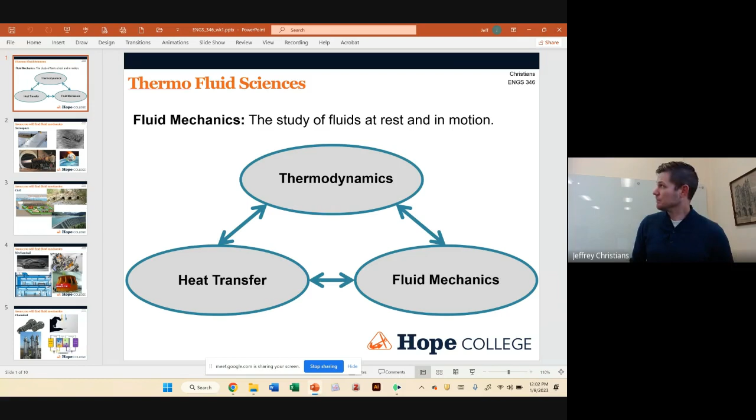So how these things kind of fit together, can put this up. So I know some of you are in fluids. Obviously, that's what we're taking now. Some of you are also in heat transfer. I think almost everybody just took thermo. These things are all kind of part of the same larger, what we call thermofluid sciences. So they all have pretty significant overlap.

If you're taking fluids, and for the couple of you that are also taking heat transfer, especially later in the semester, you'll be like, we're doing the same thing in both classes. All of these areas share quite a bit, because if you want to understand how fluids move and behave and flow, you need to know how energy works in those systems. So you might need energy balances. And if you want to understand how heat moves in fluids, you have to also understand how fluids move and behave. So there's a lot of crosstalk between all of these different areas.

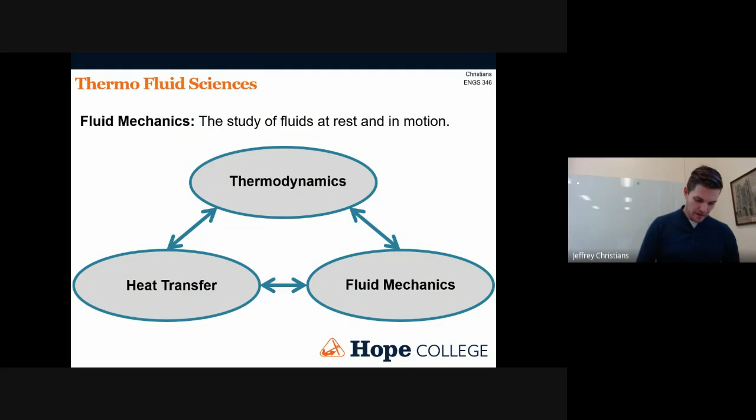No, rats. Ignore. Start working. Don't hit the wrong button. Okay, cool.

So if you want to kind of know where some of this stuff might show up, maybe you'll find something that's kind of interesting to you. We're obviously going to touch in little bits and pieces on a lot of these areas. Obviously, one place that you think of when you think of how do fluids behave, why do we care about this, is in the aerospace industry.

So if you want to look at rocket engine design or airplane wing design, maybe next time you're on a flight, look out the window if you're by the wing, and you'll see out on the edge of the wing these little sticky up things. Why are little sticky up things on the edge of the wing? Well, it's to control boundary layers and basically prevent your airplane from falling out of the sky. So they're kind of important, just these little kind of funky fin things. We'll learn about why those are there, why you would want something like that, and how some of this stuff works and behaves.

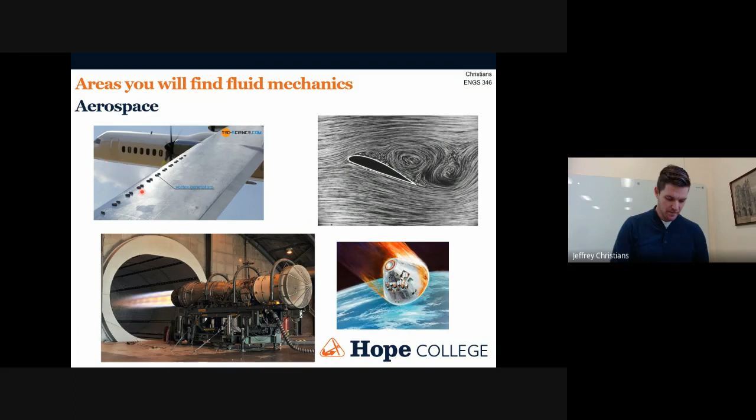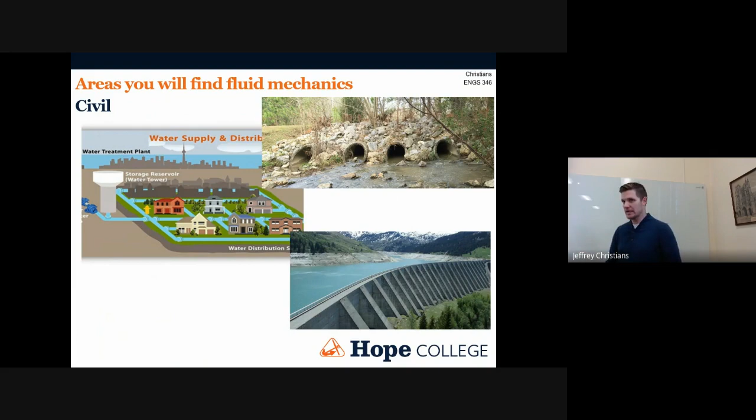If you're a civil engineer, then typically you're not looking at airplane wing design, but you're looking at how fluids flow in, say, a water supply and distribution, or a drainage distribution, or you want to look at how water exerts pressure on something like a dam, or in a system like that. So we're going to learn about things that are kind of related to those types of applications.

Where else? If you're a chemical engineer, often you're looking at fluid flow problems. The top right one is what we would call microfluidics. Sometimes it's actually beneficial to be able to scale things down, especially for diagnostics. There's a whole area of chemical engineering centered around medical diagnostics.

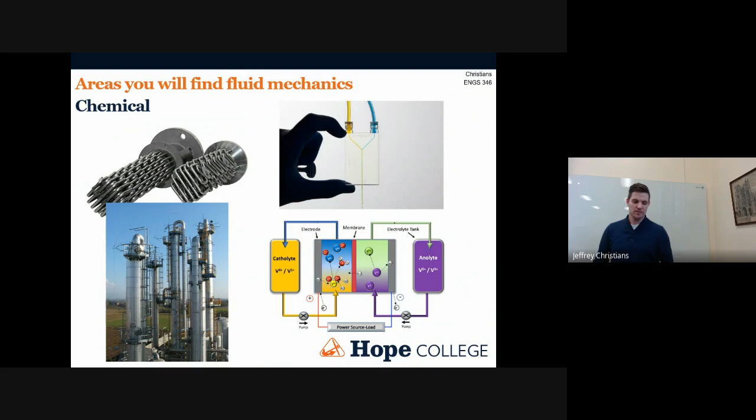And especially for high power, if you want to discharge this really fast, you have to look at how ions are flowing and moving in the solution, and look at the fluid aspects of this battery system as well. Okay, what else?

Biomedical. You're looking at designing an artificial heart, how blood flows through the body, how arteries and veins could clog, any of those kinds of things where you're looking at fluids in the body. Obviously some of the aspects of fluid mechanics are going to be important.

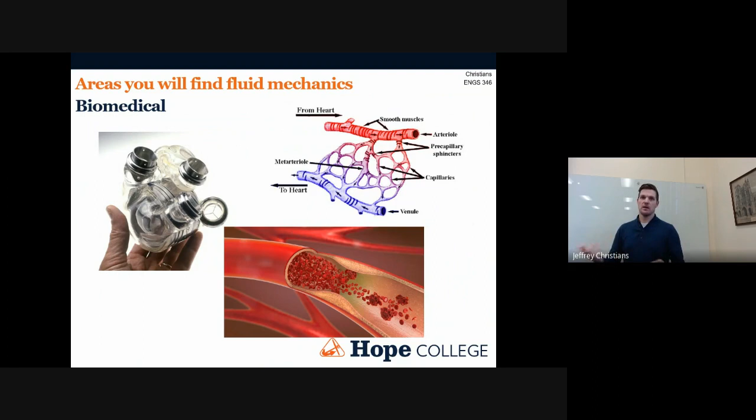And I think all of you have played, will play, or still play some sort of sport. There are fun applications, and we'll touch on quite a few of these throughout the semester. Like, why is a golf ball shaped the way it is? Why, when you watch people in the Olympics in a road bike race, do they have these really goofy helmets with a big point on the back? Why do we make helmets like that? How do you make a more aerodynamic race car?

Or why, when you look at anything aerodynamic or streamlined in shape, is it long and pointy at the back end? Any modern car, all of the SUVs, are now sloped toward the back. Why do we design cars like that? So lots of sports and practical real life applications. We'll touch on different things about fluids that are just weird and interesting, because I think it's fun. But hopefully you'll find at least something relatively interesting to whatever you happen to be doing.

I know there are a bunch of us here with a lot of different interests. We'll try to touch on a bunch of those here in fluids, because I think it touches on a lot of different things.

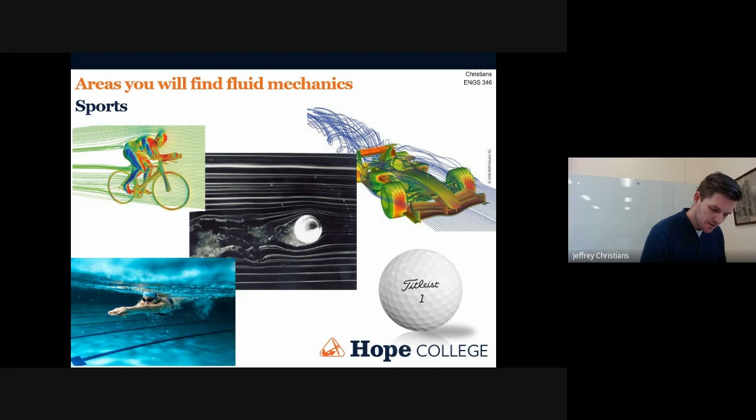So in a fluid, we'll start with kind of a simple definition. So what is a fluid? It's going to be a... sorry, not a solid. A liquid or gas.

It's not on the screen. It should be on the screen. It's on my screen. Be on the screen. All right. No, don't do that. Sorry, guys. Amateur hour over here on the screen. Still not on the screen. Duplicate. Go. It did, and then it changed my settings. Oh, fine. All right, give me a second. How do I do it? No, duplicate. Do that. Yay.

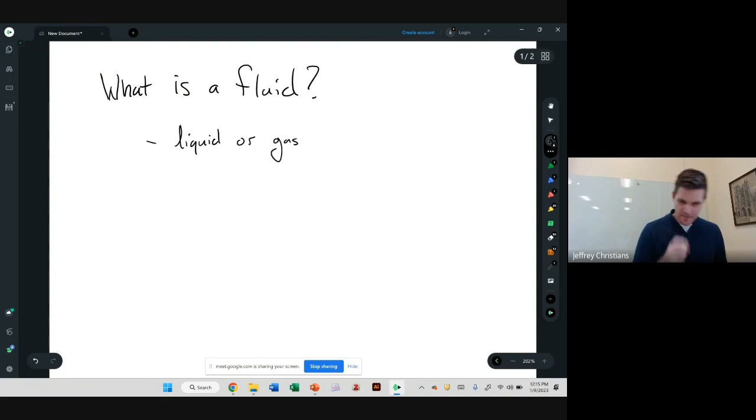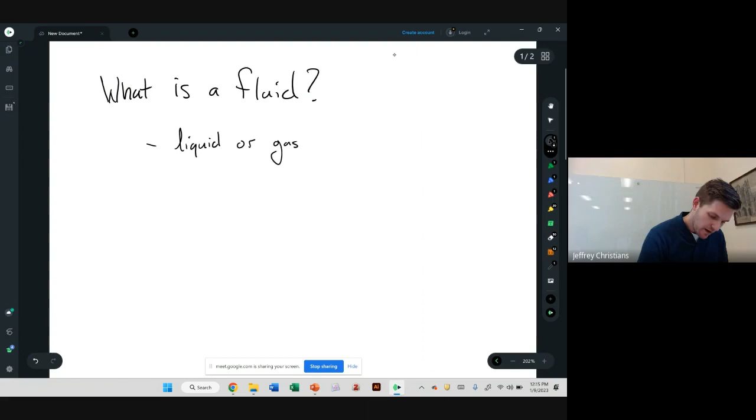All right. Okay, so what is a fluid? So a fluid is a liquid or a gas. Right, big news. Fluids are by nature discrete, so they're made up of individual atoms, but we are not going to treat them that way. So they're discrete, but we will treat them as continuous.

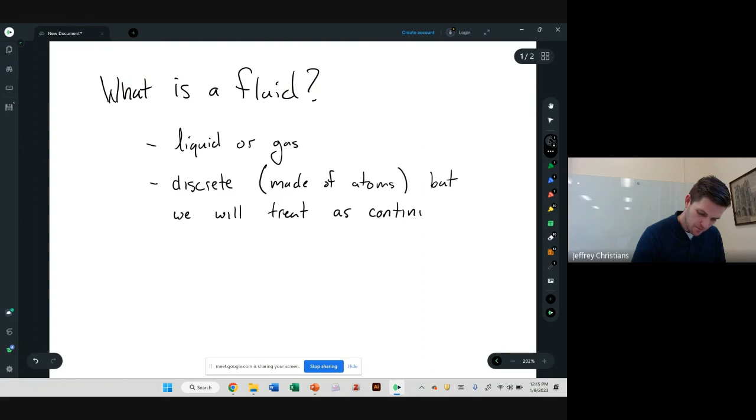So in a real fluid, like the air in this room, if I take a chunk of air in this room, there is some discrete number of atoms in that air, and I could use the amount of atoms in that air to calculate a density. And if I took another chunk of air somewhere else, there's going to be a slightly different number of atoms there. So I'm going to have a slightly different density, a couple more, a couple less. But we have large numbers, so it's going to be very, very small.

So in practice, most of the time, fluids are continuous. If I take a chunk of air from right here and a chunk of air from right there, they're the same density, same properties, same viscosity, because they have the same number of atoms, at least pretty close. That assumption will start to break down when you get to systems that are really, really low pressure. So if I take a chunk of air here and there are 4 atoms, and over here there are 6, all of a sudden maybe that matters. Those are pretty weird conditions for normal life.

The other place where that breaks down is if you go really, really small. So if you try to understand fluid behavior on the nanometer scale, where atoms are not infinitely small, but they're big, then that starts to break down as well. We're not going to go that small. So for practical purposes, for macro scale, everyday object size things, fluids are continuous media. We don't have to treat them as individual atoms.

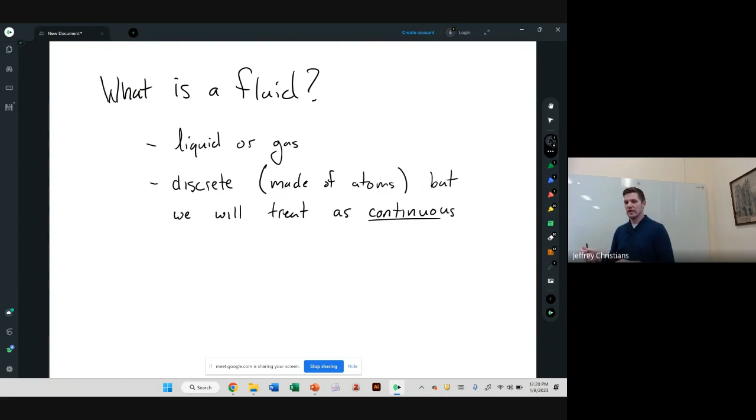Okay, so fluids play nice. There's a wide range of ways that we have to look at fluids to actually be able to analyze them. So this is where I think this class is kind of fun, because it sees a whole bunch of different physics coming together to try to explain fluid behavior. Fluids often do things that aren't really intuitive, but it's the combination of a whole bunch of different ways of looking at it. So we analyze fluids with a whole bunch of different methods. Okay, so one physical law that we're going to use is conservation of mass. If we want to understand how fluids flow and move, they have to obey conservation of mass.

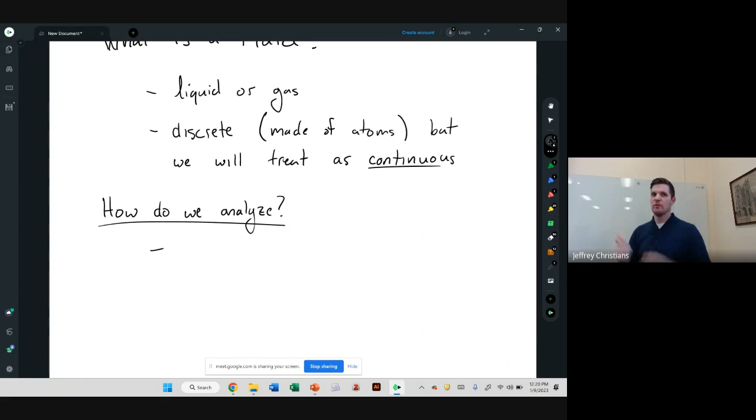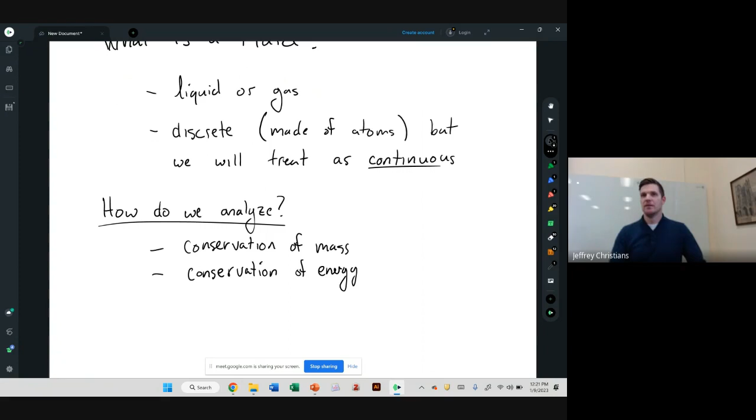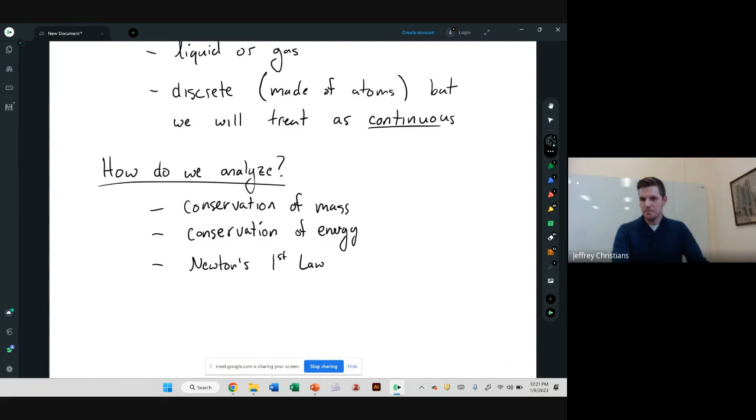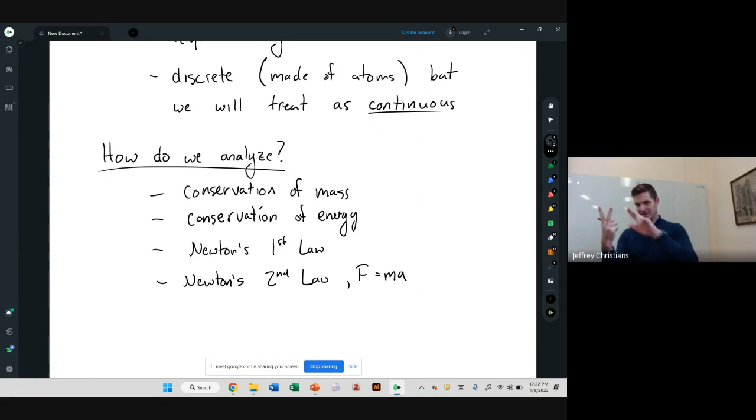All right, what other physical laws like that might you think come into play in fluids class? Things that you've learned in other engineering classes or physics class. Conservation of energy. Conservation of energy, wonderful. If we didn't get that, I would have been sad. If you want to understand how forces work in fluids, like if I push a fluid, what happens? What physical law? Newton's first law. Okay, what other one? The good friend of Newton's first law. Newton's second law, which is what? So Newton's second law is one that we're going to use a lot. What's the more colloquial version? Force equals, yeah. Okay, what's the very good friend from thermo of conservation of energy, or the first law of thermodynamics? Second law of thermodynamics.

You lost it. Oh, I think I lost my sharing. Give me a second.

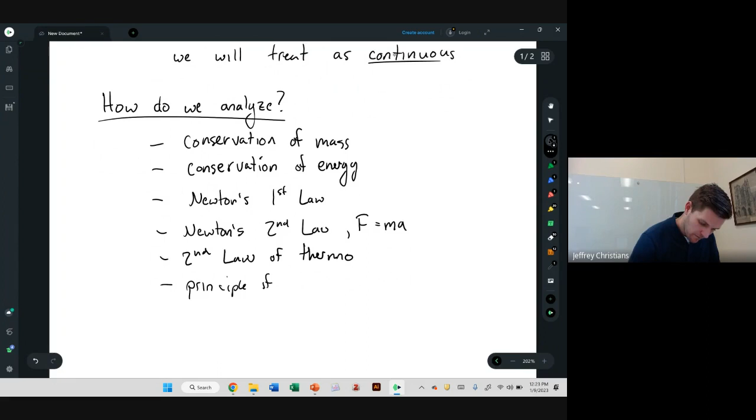Okay, so Newton's first law, Newton's second law. Second law of thermo, yes. What if you had a fluid rotating or spinning? Is there any Newton's law type law that deals with spinning things? Torques, yeah, so we'll be calculating torques, but remember there's a conservation of angular momentum. This is why when you spin on a spinny chair and you hold your arms out, you go slow, and you tuck your arms in and you go really fast, because the total angular momentum in the system has to stay the same. That's one that we won't use too much, but that would be another one. So this would be principle of angular momentum.

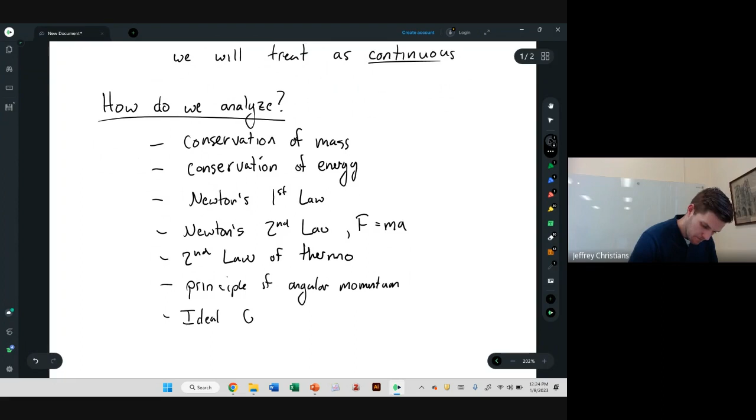And then we'll also use things like ideal gas law. You remember that from thermo or chemistry. We did in thermo a little bit of non-ideal gases. We're not going to do non-ideal gas stuff in fluids, really. We'll save that for other places. But we will do some ideal gas law stuff. And we're dealing with real world stuff, so we'll also have to bake in some understanding of physical properties. One of the key ones for fluids is viscosity, but also density and some of those things that you might know already.

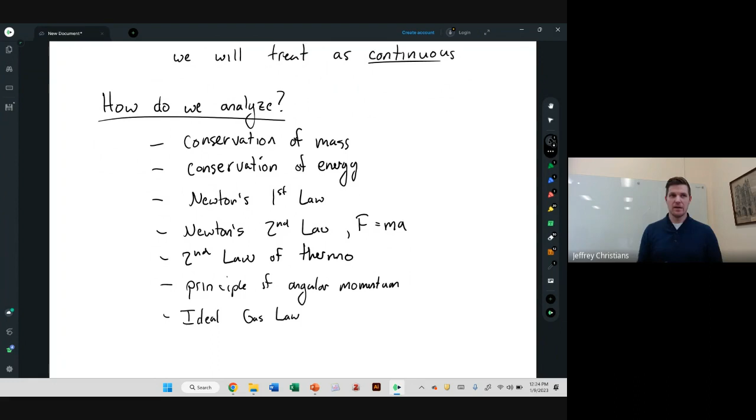So just to give a sense of where we're going to be drawing from, the ones that we're going to spend the most time on: certainly conservation of mass, a little bit conservation of energy, not much. So I'll star that one. We will spend a little bit of time on that. Newton's second law, we'll definitely spend quite a bit of time on. Basically no time with the second law of thermo. We might mention it. I might never mention it again.

It's okay. I like the second law of thermo, but we won't really touch on it here. Principle of angular momentum: we might see that come up a little bit in videos talking about vortexes, where fluids start to swirl. We're not going to spend too much time on it. We certainly won't dive too deep into the math of that.

And then we will do a little bit of ideal gas law and quite a bit of physical properties. So these will kind of be our home for this class at least. So we're going to look at conservation of energy, right? If fluids are moving, they have energy. So we want to see what that looks like and where it goes and how we can take one form of energy and turn it into another a little bit. Mostly we'll be looking at changing from one form of mechanical energy to another, like changing from pressure to velocity, something like that.

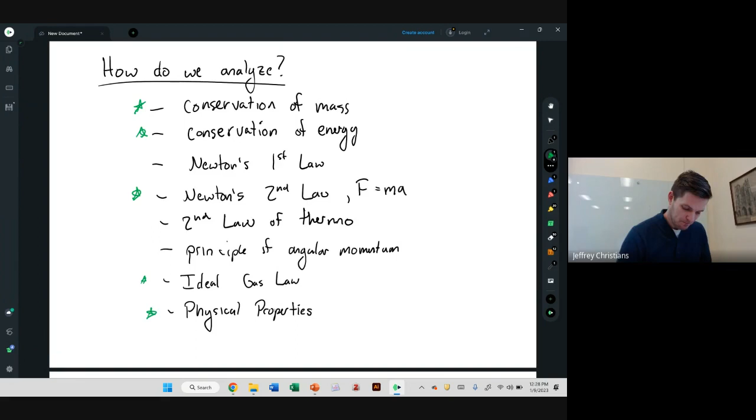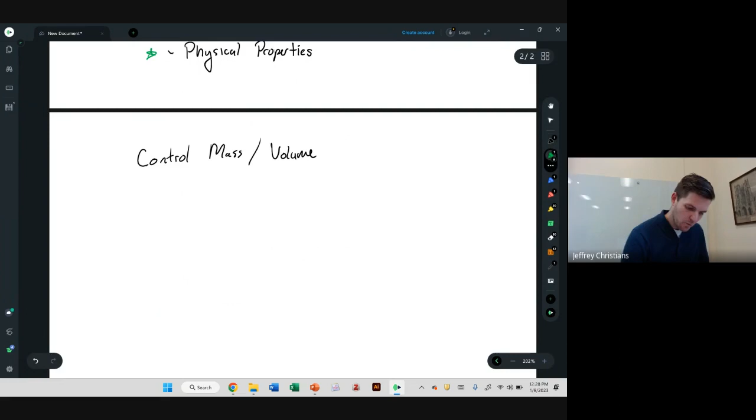We're also going to be using some of the same kind of tools that we used for analyzing fluids. In thermo, we used control masses and control volumes. Those will both show up again. So if you imagine, let's say, get black again. So we're typically going to be looking at control volumes. That maybe makes sense because it's going to be harder to track an individual mass of fluid because you push on it and it goes all over the place.

We will actually do that. It's kind of fun to do control mass analysis on fluids. You basically track every individual particle. If you ever look at modeled fluid behavior, and we will here in a second, it's all based on control mass analysis of fluids. So we'll do the math behind how you build up these computer simulations of fluid flow. We won't do solutions by hand too much. We will a little bit. It'll be kind of fun. But we'll do the super easy ones where everything is really easy and well behaved.

A lot of times we'll focus though on control volumes because it's much easier to define a set volume and look at how fluid goes into that and how fluid goes out of it, and maybe it changes speed or something like that. So we'll do that quite a bit, right? We could imagine a number of different things. So I'm going to pause it there.

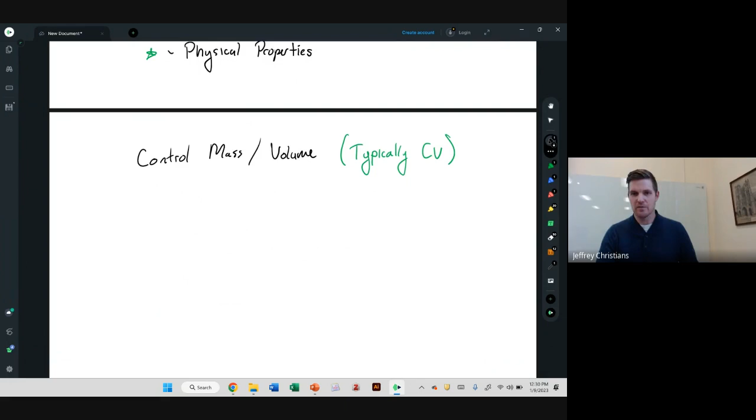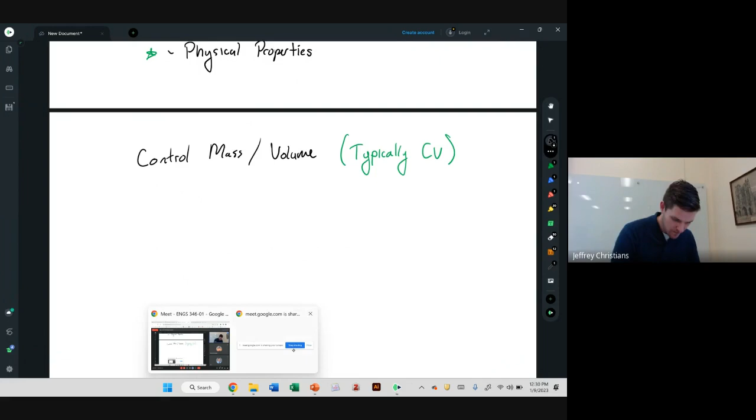We'll pick up with some of the other notes, but for the rest of today, we'll watch some videos that I think are kind of interesting. And we'll see if we can actually get it to work with sound. It probably will take me a second to actually get this working. Okay, so you can see hopefully Moodle.

Okay, so this first one, we'll just watch snippets of it. Don Pettit is an astronaut that spent a total of about a year in space. And when you're an astronaut, you're typically a huge nerd, and Don Pettit fits that description quite well. I got to see him give a presentation. It was weird. It was in a little room smaller than this, and there were only like 20 people, when usually astronauts giving speaking events get lots of people in a huge room. So it was kind of fun.

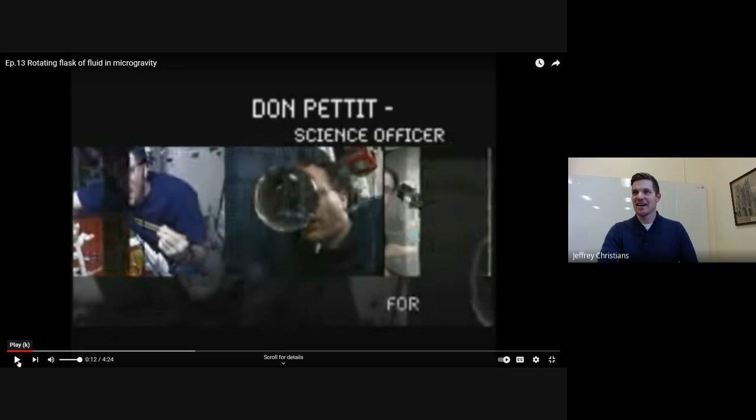So you get to sit around and you don't have stuff. You have like water and that's it. So he brought water and you have high-speed cameras and all that kind of stuff. So he played around with fluids and was like the most excited about little fluids in space that anyone could ever be. It was kind of fantastic. So he has a whole bunch of videos online.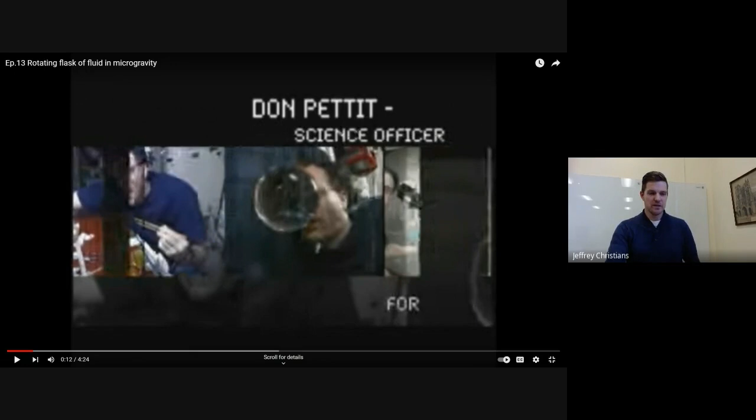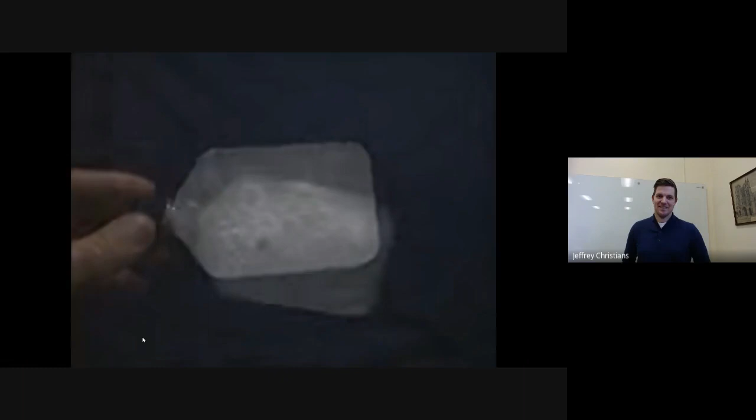This one is just, I guess, just to see kind of some of the counterintuitive behaviors that you can see in fluids. And because I like Don Pettit. This is them playing around with it. Those are just air bubbles, but they don't separate because there's no gravity.

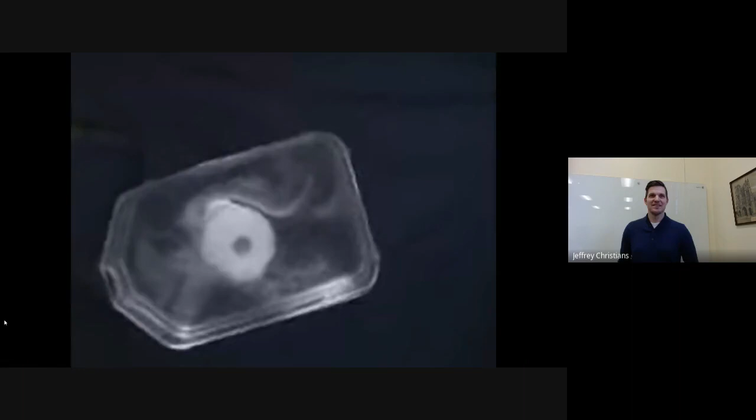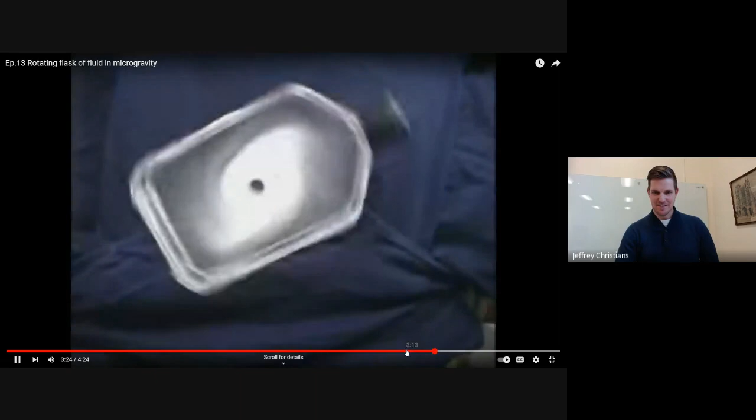You'll learn about boundary conditions and how they can influence fluid behavior. One of the fun things. Yeah, you get these kind of weird... Well, I like Don Pettit, but we don't need to listen to him talk so much.

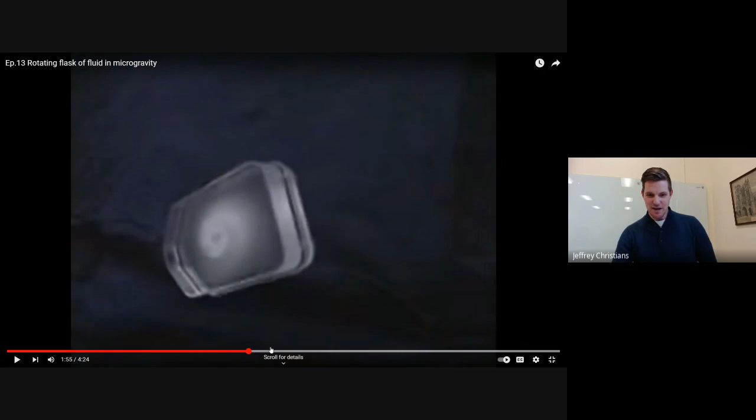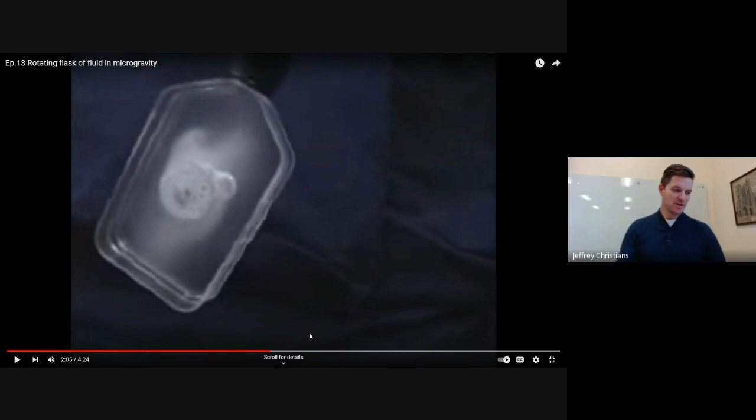You get, I don't know if you saw it in a couple of the, yeah, this is a good shot. So you get these kind of weird spirals, but they don't go like backwards with the direction of motion. They go like toward the direction of motion, which is like backwards to how I would think that they should go. So sometimes you can get kind of weird behavior, especially when you're not experiencing Earth's gravity.

Don Pettit has, if you like hearing him narrate his wonky fluid experiments, there are tons of them. We'll look at one more of his because I think it's fun. So this one just I think is a good demonstration of F equals ma in a fluid. So what he has here, what you're looking at is a solid sphere of water, right? Remember, this is in space, so things are fun.

So there's no gravity, so water will just form like a huge drop, even though it's like the size of your head. It's just a big ball of water. And then he took a syringe and basically injected air as a bubble into the center of that. And that air bubble stays in the middle because there's no gravity to separate them. So you have an air bubble inside of a big bubble of water because space is wonderful.

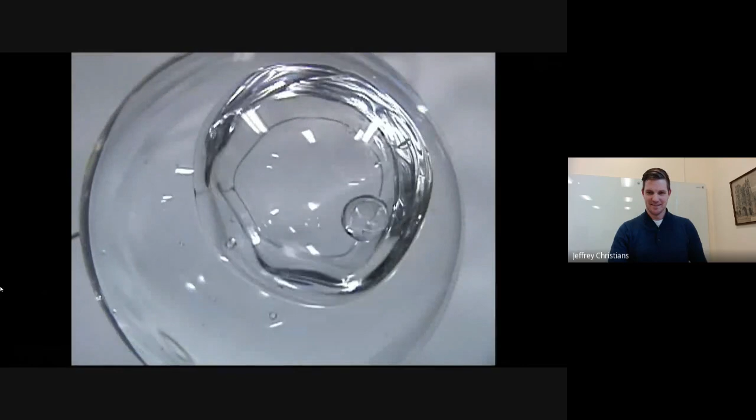And then he's taking a syringe and injecting another bubble of water. So this little thing is a bubble of water inside a bubble of air, inside a bubble of water. It's fantastic. And basically we'll watch as that center bubble of water kind of bounces around in there, what happens. So watch it kind of roll around. And then you see all of a sudden it got smaller. So there's a mass transfer, basically the water loses some of its mass and then it bounces and shoots it off the other way.

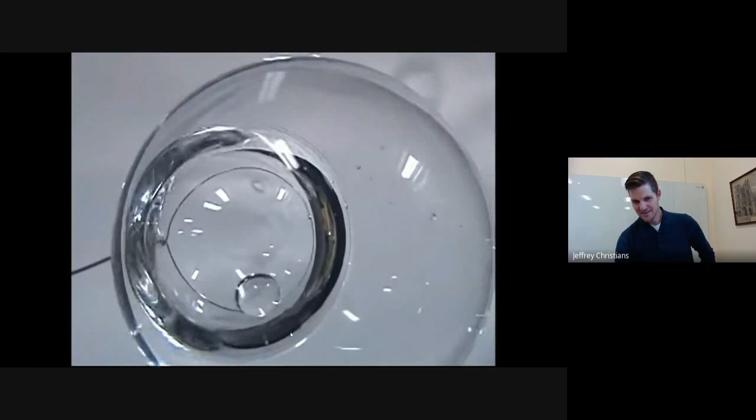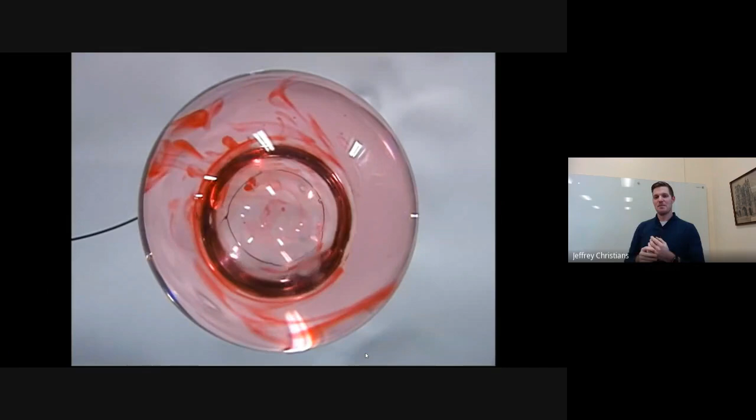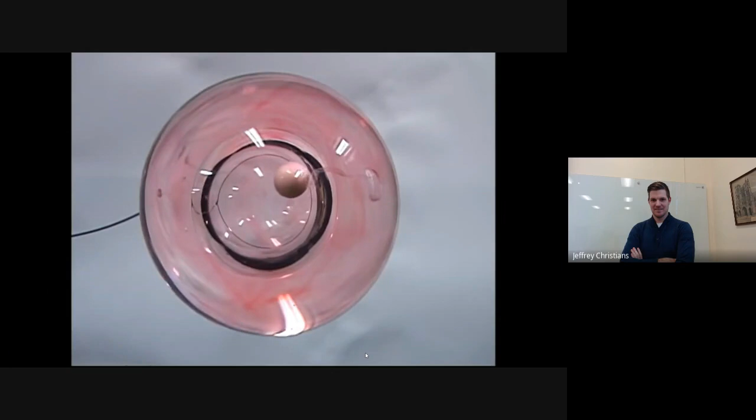Yeah. They use food coloring so you can see a little bit easier. You see that jet go into the big one, and then the little bubble shoots off the other way. It's F equals ma. Well, kind of wild. So you can do fun things in space if you have lots of time and only water and syringes to play around with. They don't let you take a whole lot of other stuff into space.

This is one that maybe you've seen stuff like this. Get rid of the ad. So this is an ad for an aerodynamic kit for a semi truck. Maybe you've seen stuff kind of like this on semi trucks driving down the highway. You've seen ones where they have like the skirt along the bottom, which maybe makes sense why that would give you better aerodynamics. But then sometimes they have like big flaps on the back side of the truck. This is an advertisement for a kit like that.

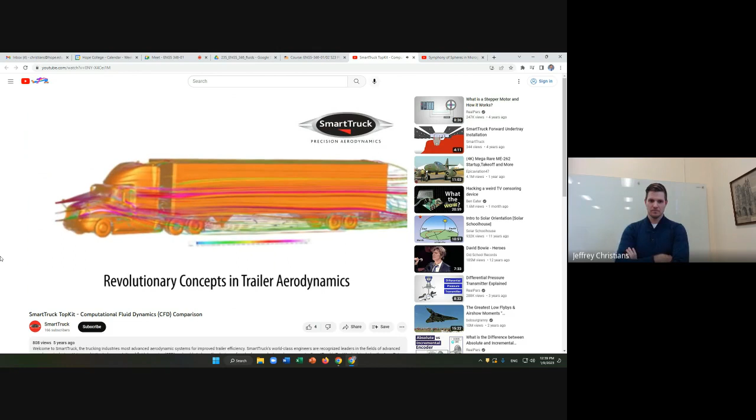So when you look at a simulation like this, where you see those lines or the particles that we just saw there, all of the actual physics that's underlying those computer simulations, that's what we'll learn about, and we'll learn how do you actually build a simulation like that. If any of you do fluids in the real world, you'll use simulation tools like that. So we'll learn how do those actually come about, what's behind all of that. But just to point out kind of what the simulation results would look like.

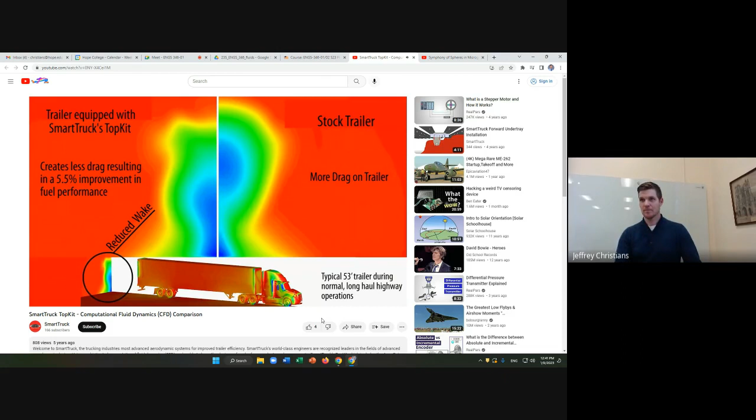All right, we don't need to contact them.

Some kind of terminology and things like drag and injecting accelerated fluid into the low pressure wake and all sorts of stuff that you'll know actually what all of that stuff means and why it works and why we do things the way we do by the end of the class.

The last video that we'll watch is kind of a comparison between what we might see in an experiment and what you might see in kind of a simple computational model. So the computational models in fluids are really, really valuable. But one of the key challenges is fluids are really hard. And when we try to build up computational models, there are assumptions that we make that are not true. We can capture the big picture, but it's hard to get at all of the fine detail of results.

So fluids is one of these areas that we use a mix of computational and experimental work to be able to actually understand it, right? You've all seen pictures of like a car being tested in a wind tunnel. The reason we have to do wind tunnel tests is because our computational methods aren't good enough to be able to get all of the information we need. You'll see that a little bit here. So we're going to look at what we call a cylinder in cross flow.

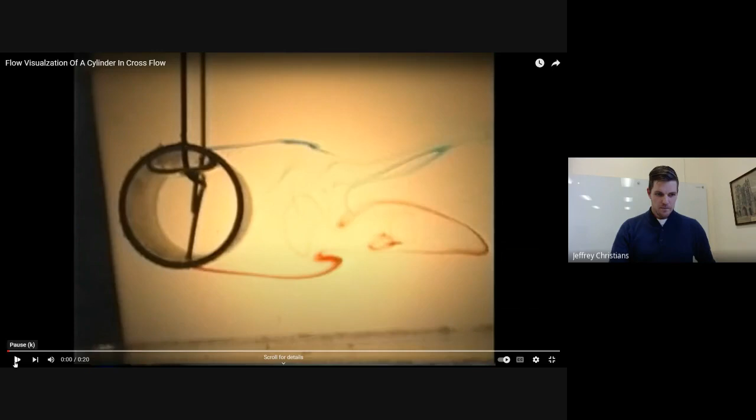Okay, so you see those vortexes that are forming. So you see the swirls, and you can see it's kind of like a pulsating thing where you see a vortex form, and then two vortexes form and two vortexes form. That's kind of a classic result.

If you change, no, not that. I didn't want that. I want to go back here.

So if we changed the velocity of the air, we would start to see different effects. If you made it really, really fast, then it would just be all swirling and mixing behind it. If you did it slow enough, the fluid would actually slip cleanly across it, and you wouldn't have any wake at all. If you were in the middle, sometimes you can get not the two vortexes forming at once. You can get them forming alternating top and bottom. So you can get lots of different fun things.

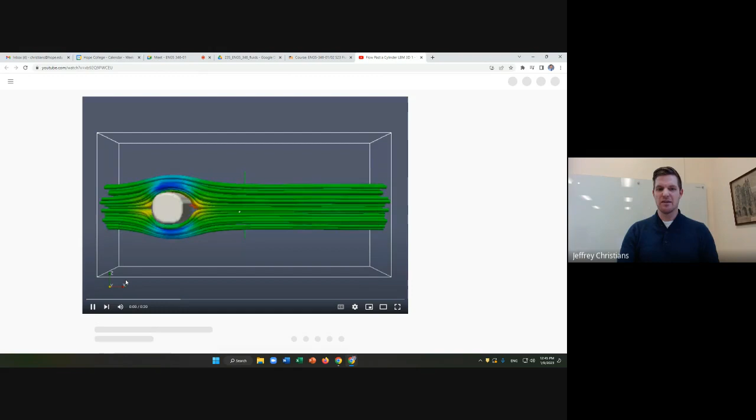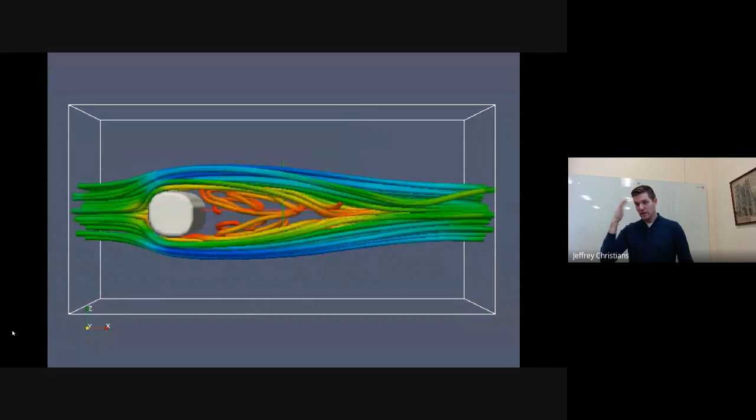This is the attempt at a simulation. It's a fairly coarse-grained simulation, but a computational simulation of a system with similar dynamics. So you can see we're forming similar-ish vortices. So we get the big picture right, but obviously we're losing a lot of detail in this simulation. We could do a better simulation. You can always do a better simulation. Making a better simulation is going to take more time or more computing resources. So we're always trying to balance how do we do that well.

I don't want that. Okay. Yay for autoplay. So